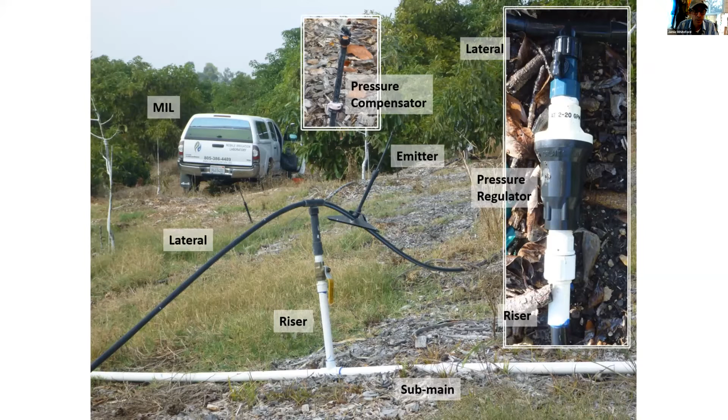So with that, we'll move into the first consequential slide, if you will. So irrigation system management, distribution uniformity. So what do we mean by distribution uniformity, or DU? Well, to me, it just really means that DU is a measure of how uniformly the irrigation system disperses water.

And I just want to make the distinction that there's a difference between good distribution uniformity and efficient water use. Okay, because water use, it depends on kind of what you're trying to achieve. But distribution uniformity is about the uniform application of that water at the field level.

Now, why do we care about DU? Well, we care about DU because we want to apply our water, and in the case where fertigation is happening, which is very common, we also want to apply that fertilizer uniformly to the entire crop. And ultimately, at the end of the day, good DU saves water, saves energy, reduces water pollution. You get healthier trees, you reduce your inputs, and ultimately it increases profits because you're getting good yields, you're reducing your pest costs, and you're reducing your input costs.

So you'll see that picture on the bottom left, DU. Do these emit the same amount of water? I mean, ultimately, that's what we're trying to do, is we're trying to see in your irrigation system, randomly sampled throughout the irrigation block, do all the emitters within that block, or at least a subpopulation of those emitters within that block, emit a uniform or the same amount of water? If yes, then that's good.

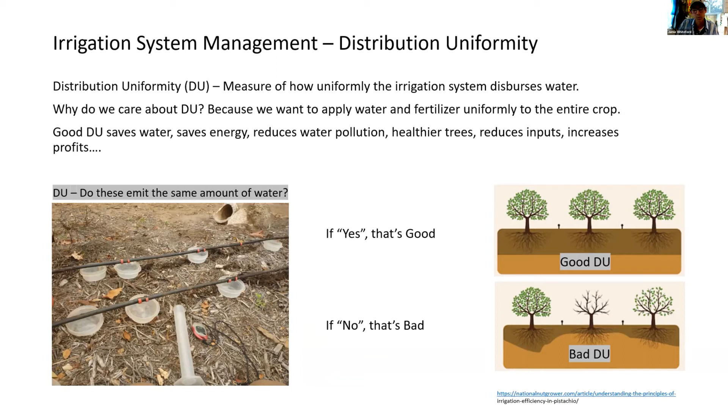Distribution uniformity, standard method. So Stu talked about low quarter distribution uniformity, DU-LQ or LQ-DU. That's a standard practice. And this is a point I think is important. It's wonderful to have a standard practice, because what that means is that we're all talking the same lingo. When I say I was out there and I measured a DU of 0.71, and I say that to a farmer, that means that I took the same approach as everybody else takes for measuring that value. And so we're talking apples to apples.

So he knows that I went over to Farmer A and I got a DU of 0.88, which is great. But then I came over to his farm and I did the same exact standard practice, and I came up with 0.71. So all things being equal, he's under par for farmers in his area. All right, so how do we get to that value? Calculating DU requires measuring and comparing flows. And again, we use the low quarter DU method that was adapted from ITRC's procedures.

And as you've probably already heard many times before, we need to have DUs that are upwards of 0.85, especially for micro sprinkler irrigation systems, to say that that's a good system DU, and for drip, you really want it above 0.9. And it's notable that these DUs aren't at 1, and the reason is because, as Stu pointed out, no system is perfect, and so you're never going to get 100% DU. Well, you might, but there are inefficiencies in a typical system, and so again, 0.9-ish is acceptable.

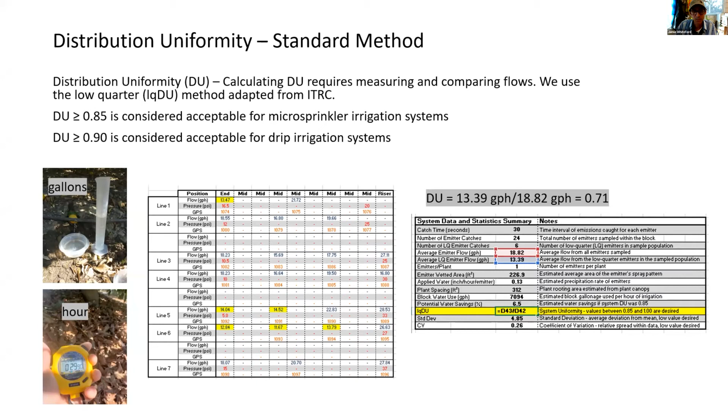And again, I want to point out, measuring your DU doesn't necessarily solve your problems. It just helps identify what the problem may be. Okay, so our job is to point you in the right direction. Your job is to fix it. All right, distribution uniformity. What affects DU? All kinds of things affect DU.

Pressure, friction, and system integrity all play a role in affecting DU because, as Stu indicated, the system was designed so that all of these factors balance to deliver the expected performance. However, over time, with wear and tear, that balance can shift. So the factors that affect DU and that we're interested in addressing include water pressure, because water pressure is what makes water flow, and that pressure can be either too high or too low, or just right.

Friction loss is also another factor. It reduces pressure. Perhaps it reduces the pressure too low to support flow. And again, this goes back to what Stu was saying. There's nominal flows, and then there's necessary flows in order for some system components, particularly emitters, to work properly. So you got to have the right system pressure in order to be able to get what you expect out of your system.

And then, of course, system integrity, or the ability of that system to deliver uniform flows at desired outlets, and hopefully that would be emitters. And so these are the factors that need to be addressed to maintain good DU. Basically, you want to make sure you have uniform flows at your desired outlets or emitters. And so pressure, that's provided by your pumps, elevation. So you really need to know what your source pressure is to help isolate issues. You got to know what you're starting with to know what you might end up with.

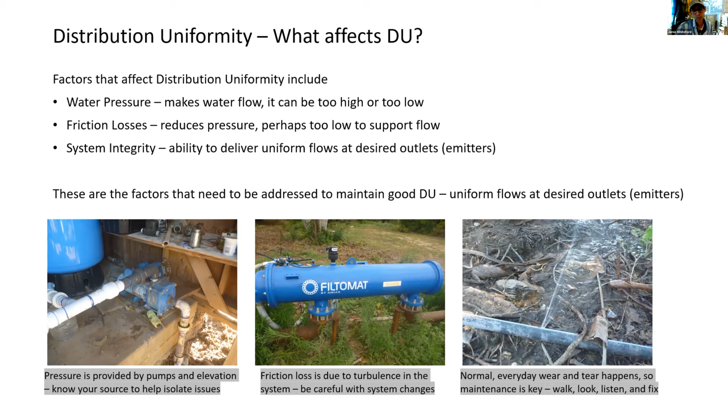All right, so what I want to do here is go through, we're going to have 3 slides that look kind of like this. And what I want to talk about are those factors that I just introduced: water pressure, friction loss, and system integrity. And I just want to go through some of the stuff that, when MIL staff are out in the field conducting an evaluation, the best we can do is troubleshoot to try and identify what issues may be present. The way that we troubleshoot is we walk, we look, we listen, and we measure.

We walk the whole block to get a feel for how it's designed so we can determine how best to collect our DU sample population. I mean, we don't have time to measure every single emitter out there in the block. So what we do is we sort of break it up into logical subpopulations, and we take measurements at those emitters. We look and we listen for things like leaks and indications of high pressure.

I mean, you can hear when an emitter is under high pressure. You know that, right? You can also see it because you see this aerosol mist where you just got all this water shooting out those emitters at very fine droplet size.

And what we measure is flow and pressure. So we actually have a pressure gauge out there for pressure measurements. And like I showed in the slide earlier, we're actually capturing emissions over time for flow.

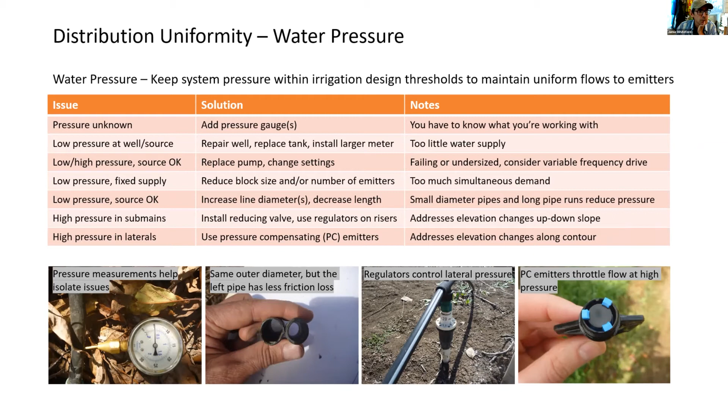If we want to talk about friction losses, again, friction losses is just one of those things that leads to poor distribution uniformity. And the reason that friction losses leads to poor distribution uniformity is because it reduces the pressure and flow. It results from turbulence as water moves through the system. There's really not a whole lot you can do about that other than having pipes that are a little bit smoother so that you don't get as much turbulence. And it's important. There's actually differences in the pipes and their ability to reduce or mitigate against friction losses.

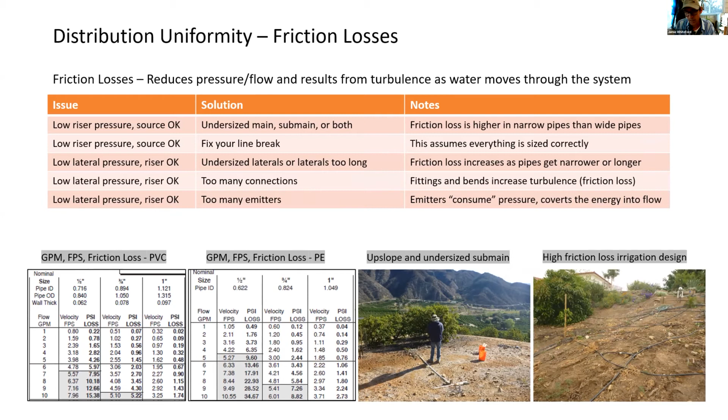And then I also want to point out the picture on the right bottom. I see this a lot, where people are just making all these connections from one lateral to the other lateral and adding on laterals, and it's a crisscross applesauce kind of situation, and it's a lot of friction losses in those small poly pipes because of the friction losses, and also all the connections, and also just the roughness factor for that pipe.

And then I want to talk about system integrity. Again, all of these are sort of observations that we see. We're walking, we're looking, we're listening, and we're measuring. And so these are a combination of system integrity breakdowns that we notice. Keeping in mind the irrigation system maintenance is what sustains uniform flows to the desired emission point.

So, going back to Stu's talk earlier, when these systems were designed, everything was balanced. You knew what the source pressure was, you knew what the runs were, what your uniformity goals were. But over time, things just sort of get changed. And so they may have been uniform back then, but changes could lead to issues now, particularly with maintenance.

So oftentimes we'll see low riser pressures, but the sources are all right. That could be just a line break, or something's restricting flow. Got laterals down on both sides of the riser. This is a common problem where riser screens are still in place, and those are just catching all the debris in the water. Or there's an inflow filter on the line, and all those things are plugged, and nobody's out there getting rid of that stuff, and that's plugging up the whole lateral.

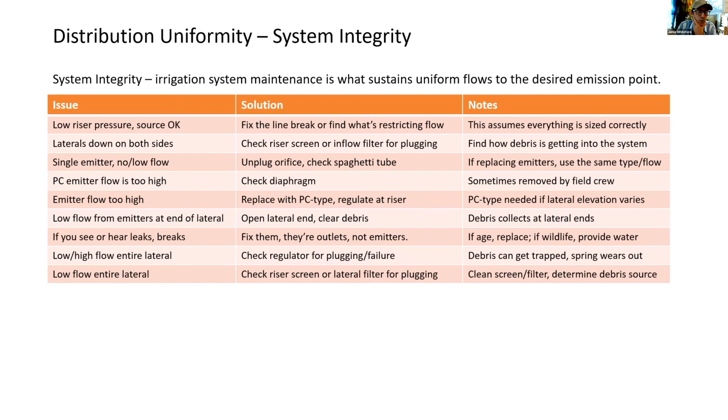So find out where you're getting your debris from, or if it's the case that the filter is not doing its job, then you need to replace that filter with one that works better. All right, and so now I'm just going to get into a slideshow of stuff we see, just to prove the points that we made earlier.

Okay, that first set. Notice anything missing? Believe it or not, people do take out the diaphragms from PC emitters and toss them over the shoulder, just like Stu said. They don't work without the diaphragm. Here's a picture, second set, just showing clogged filters. So there's a filter on the left that I see commonly. There's a filter in the middle, inline filter, right past the regulator. And then there's the debris that's caught up.

The big question is, where's that stuff coming from? You got to get that stuff out of the system. You got to fix that leak. You got to figure out where it's coming from and address that, because there shouldn't be that kind of material in your lines.

Going back to what Stu had mentioned earlier about burying drip. Okay, so you see that picture on the left side. Those are all drip emitters. You got clean water in 3 out of the 4. That fourth one, that's got organic matter that's been sucked in because it's been buried underneath that mulch. So just be careful. That means that material is getting into that emitter. And yeah, if it's clogged, you still have 3 that work, but wouldn't you rather have 4? So be careful with that.

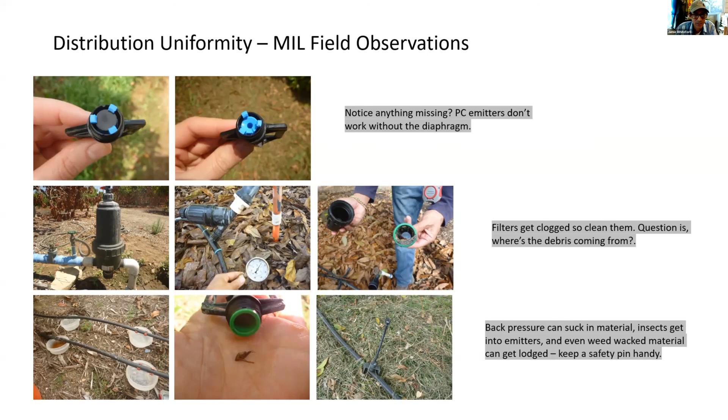All kinds of stuff can get into your emitters. There's some organic debris caught up in a typical micro sprayer. So be careful. Back pressure can suck in material. Insects love to get into emitters because there's water there, and then they get stuck. And even weed whacked material, believe it or not. I've seen weed whacked material somehow miraculously get stuck into the orifices for these emitters, like fan jets. So always keep a safety pin handy, just in case you need to clean out an emitter.

There's a riser with no pressure regulation. Hopefully there are some PC emitters on the lines to regulate that pressure. Here in Ventura, we've just got so much slope that it's always good to have some kind of pressure regulation. Plugged screen, riser screen, you see that in the middle there. Used to be recommended to keep those things in, but then filtration became standard practice. So I'd recommend taking them out, because if you don't and they get clogged, down goes your entire lateral, both sides. And again, be careful, figure out where that stuff is coming from.

And then the bottom there, okay, this is from the same irrigation block, 4 different types of fan jets. Now, I want to caution you that if you're doing this for a management perspective, like you need different flows because you got mature trees versus younger trees, then I suppose that's understandable. But if you're going to do that, they need to be operating under the same kind of flow conditions to get the performance that you need for those different things.

But if you're just allowing your irrigator to go in and just swap out whatever emitter happens to be in its fanny pack at the moment, then you're setting yourself up for poor DU and ultimately inefficient use of your water and your fertilizer and all that stuff. So maintain uniform emitters if you want to at least try to get uniform emission.

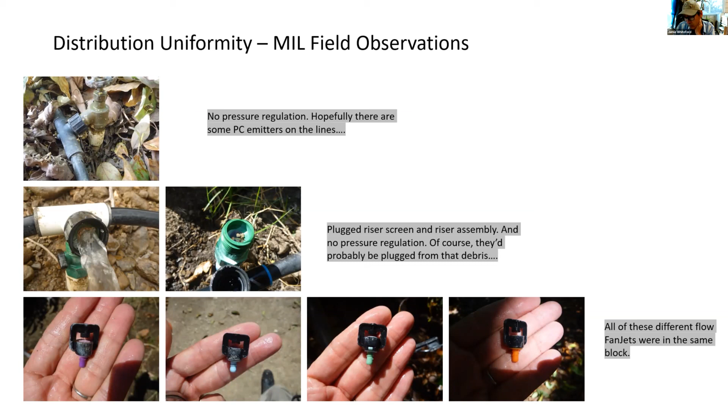High pressure, going back to that rainbow effect talked about earlier, you can usually tell when you've got high flows just because you've got all this mist and you catch rainbows from that aerosolized water. Good indication that you need pressure regulation. That middle picture, leaks are leaks. They're not emitters. They may be right next to where you want to emit, but they're leaks. So there's no pressure regulation, there's no flow regulation. So please fix them, they're just going to turn into bigger leaks. So that's not going to help you.

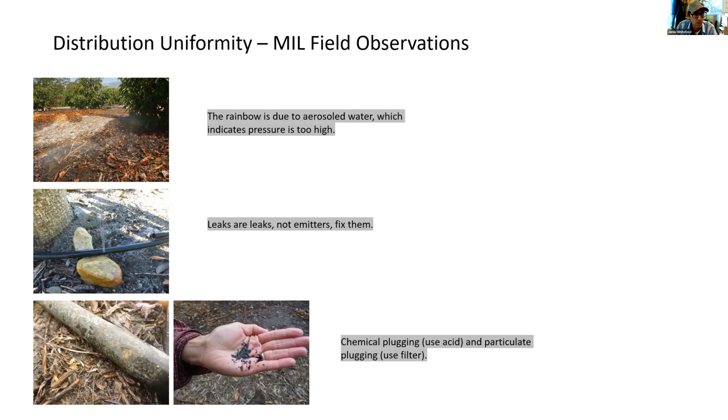Chemical plugging, on the left, we see a drip emitter clogged up. Stu had mentioned it earlier. Run some acid through that to clear it up. Do that regularly to keep them clean. Chemical precipitation is a tough one. You got to stay on top of it. You got to figure out how to address it early on. And there's some manganese there for your pleasure on the right. So, use acid, use filters, and use the right filter.

All right, so I probably went way over my time. I forgot to set my timer. But anyway, that's the end of what I want to talk about and show you. And the end. Questions?